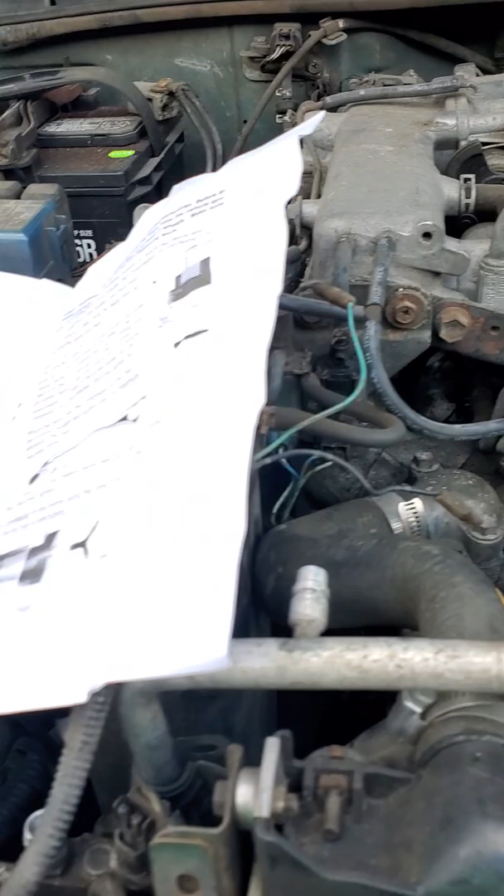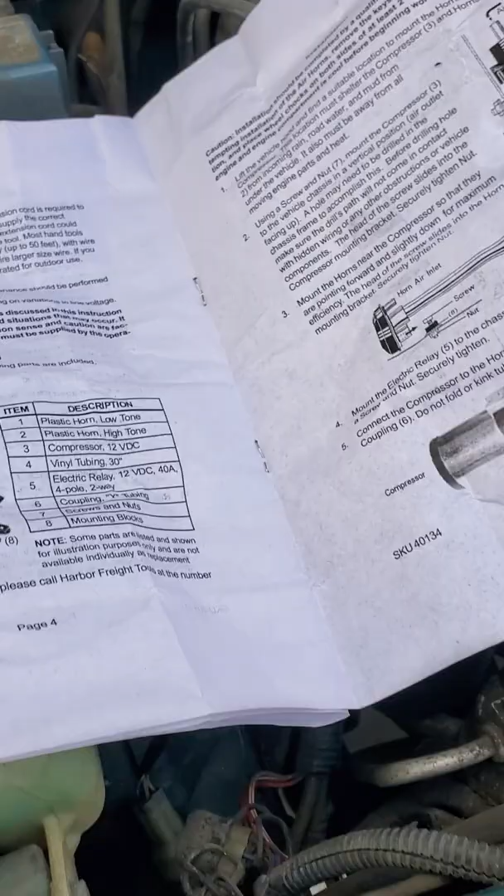I have one of these right here, a super loud 12-volt air horn. I want to say I bought this at... wow, that's a lightning storm... I want to say Harbor Freight. Did I buy it at Harbor Freight? I want to say Harbor Freight.

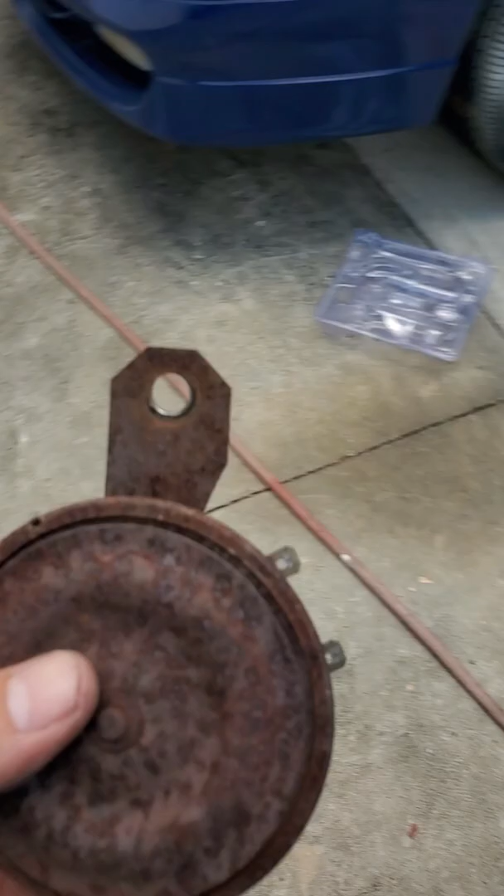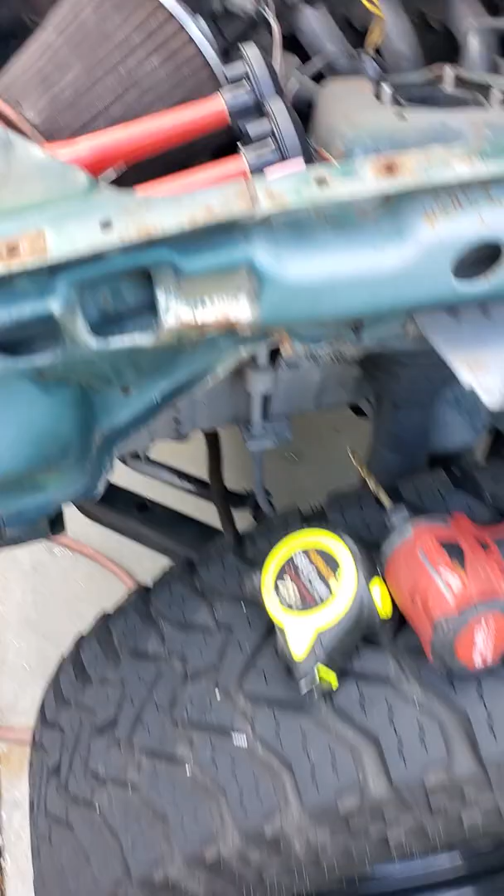And my original one that went here took a shit on me, which is this one right here. So I just went ahead and took it off. And this is where I am going to set it up at.

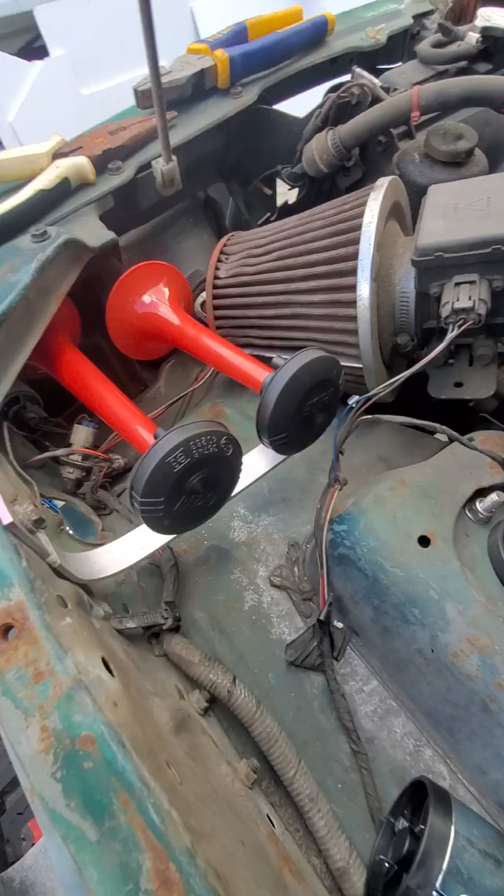So you got your intake here. Let me pull back, you got your intake right here. And I got some aluminum flat bar, bent it 2 inches. At 2 inches I bent it. And this is the bolt that has the ground on it. Make sure you put that back. And that's what it looks like, right?

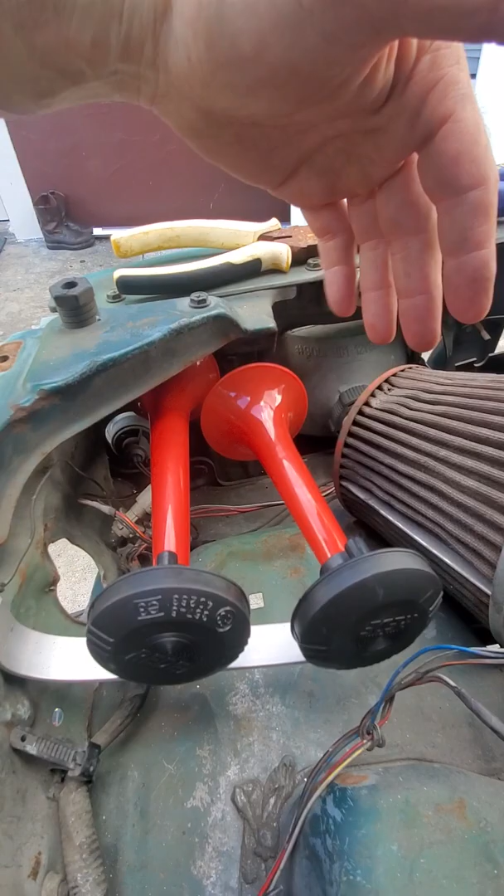And you can turn this either way you want, depending on how you want it to adjust. I can just loosen it up, turn it like that, and that's it, you know? That way it ain't hitting up on anything.

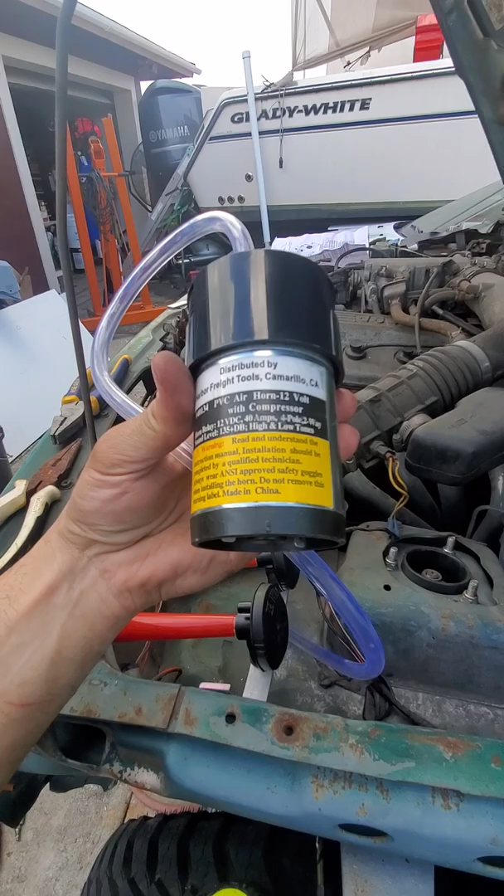And it comes with this little hose and this motor. So I don't know how much power this got. And I'm gonna have to set this up.

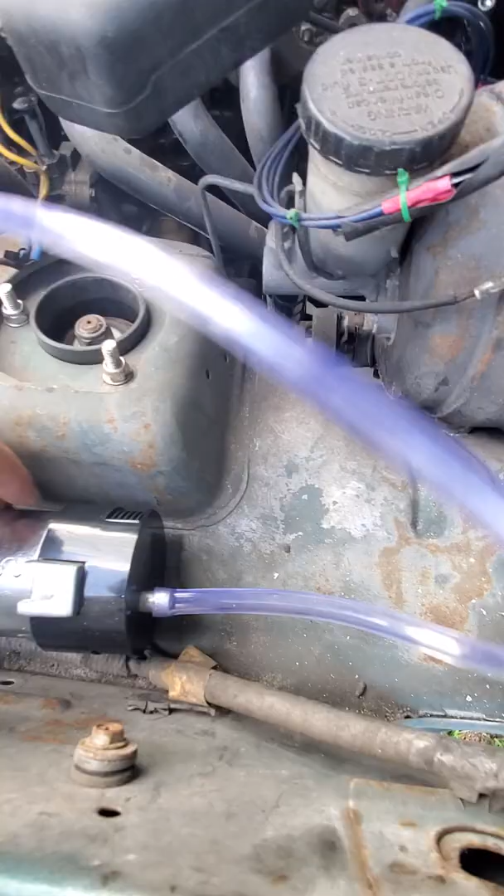Maybe right here, something close where I can hook up this little hose. Yeah, it's just a little piece of hose they give you.

So give me a chance to figure some of this out. The other thing I got to figure out is this relay it comes with. It didn't come with any wires or anything, so you got to run all your own wires.

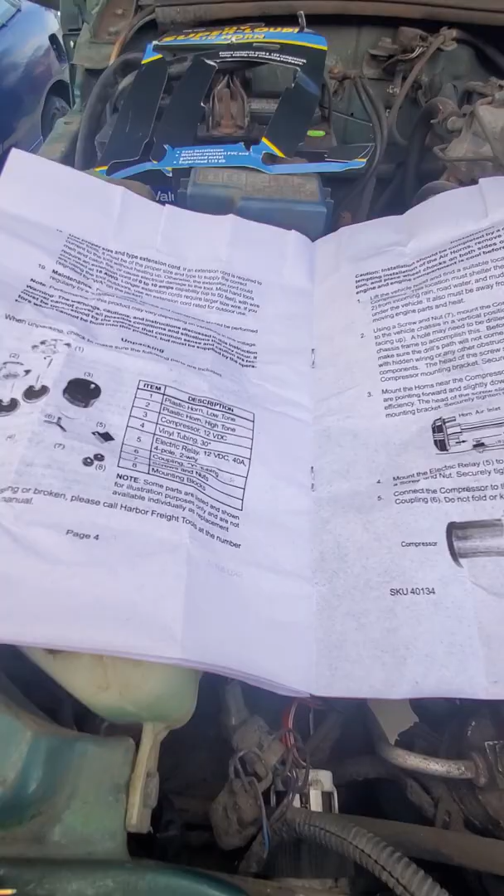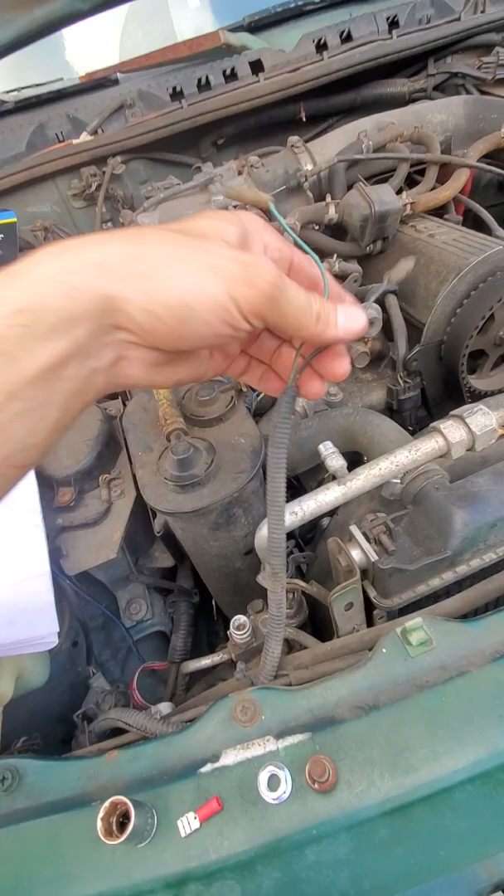And this is the diagram right here. So these are your original horn cables. I'm gonna have to put some connectors in there to extend it, and all I'm gonna do is run it straight across and back over to there.

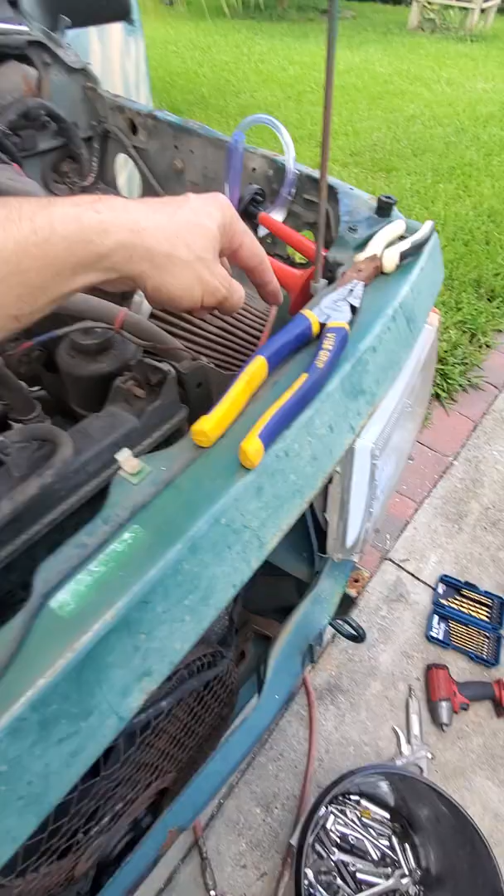As soon as I get this done, I will update it. But for right now, I'm gonna pause it, get some work done, then I'll start showing you after I get it hooked up and what it sounds like.

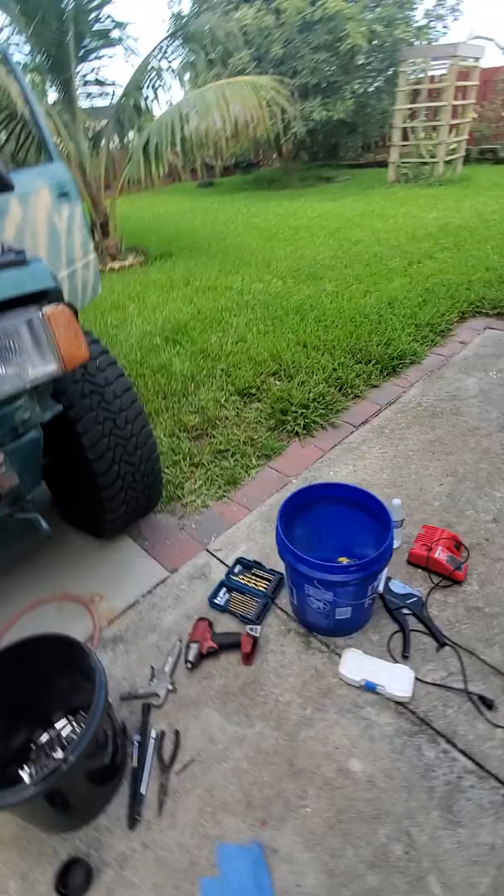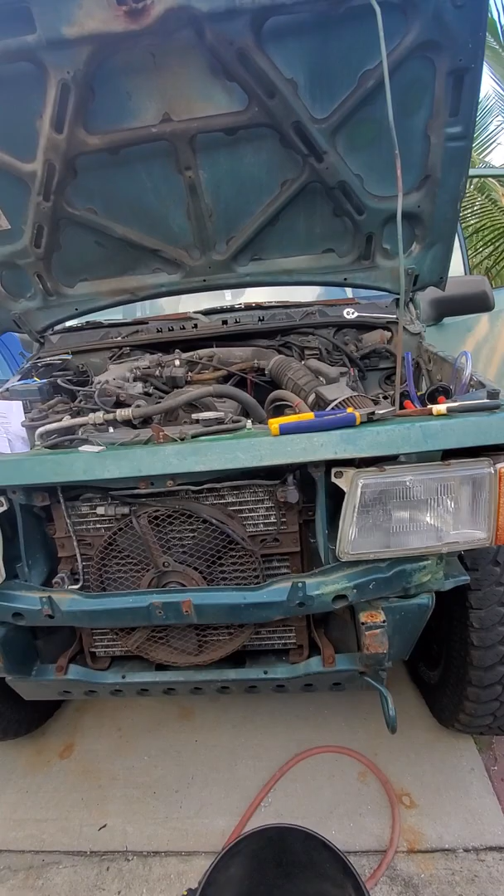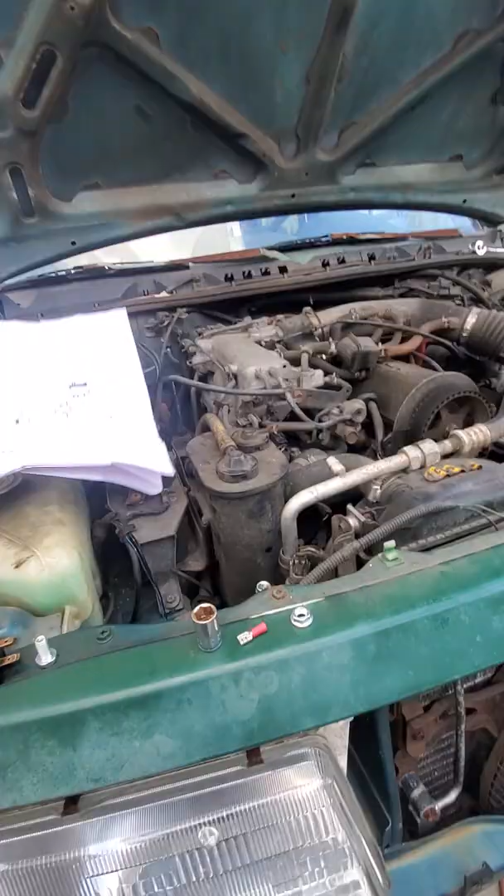So today I'm gonna work on a Geo, get one of my modifications put on, and we'll go from there. So I got the air motor set up, and let me show you what I got.

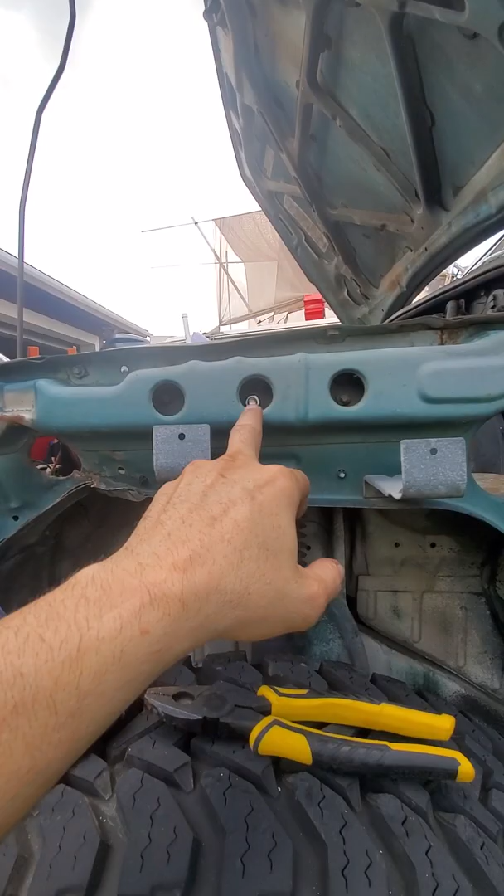So this third hole, center hole right here, when you take off your fender, I drilled a hole in there, and that's where I put it through, and that's what it looks like. So that worked out good.

All you gotta do is drill a hole, and the drill bit was a 5/16, and for these right here, the hole was a 1/4 inch drilled.

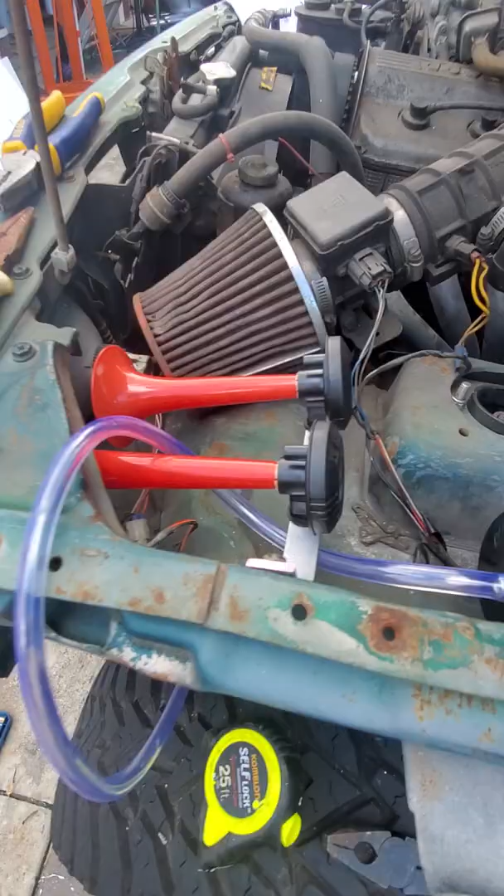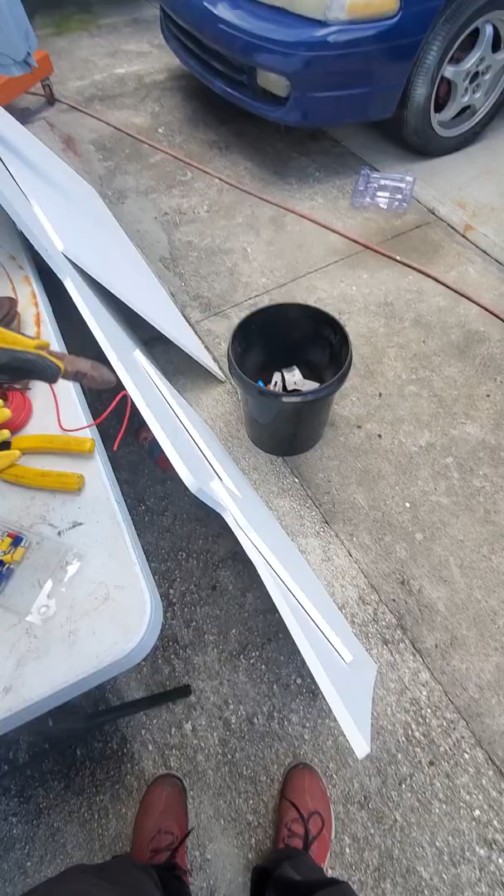So let me get done with the next process, and I'll show you what I did next, which is probably gonna be hooking up the hose with this T right here. So you're gonna have to cut it, so make sure you get something you can cut the hose real nice.

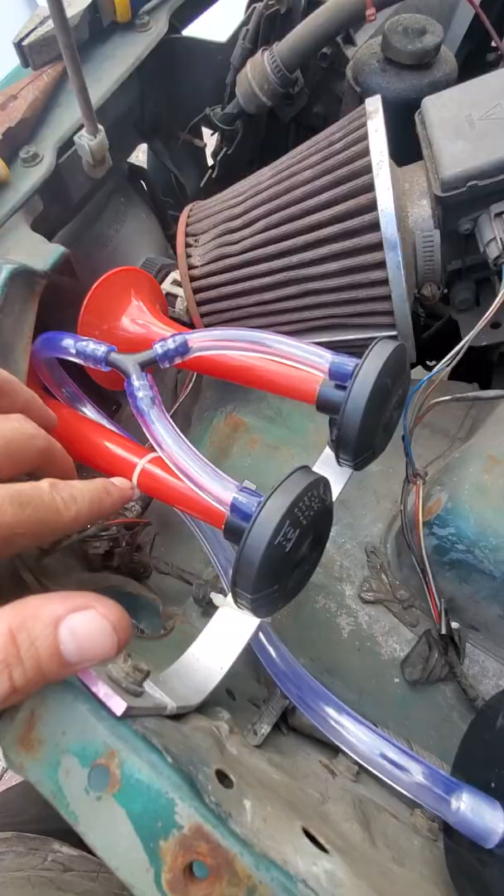So I got this part set up. I just tie strap it there and there to keep it from vibrating off anything. That's all I did right there.

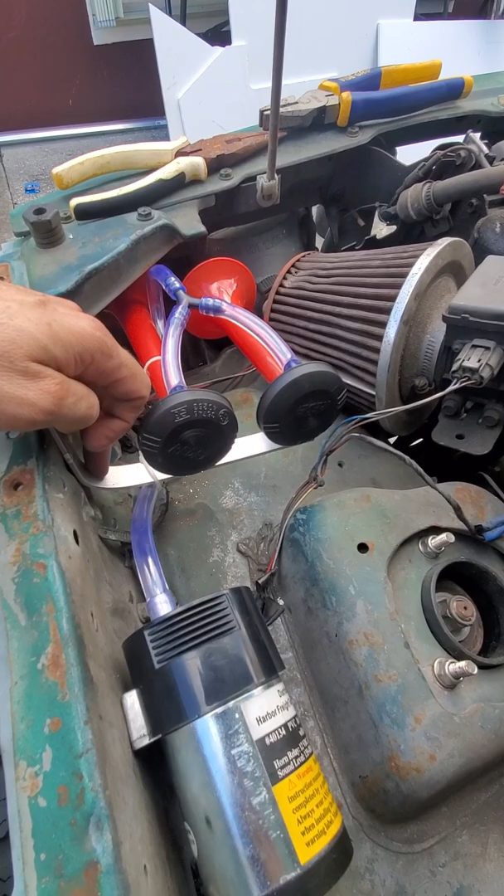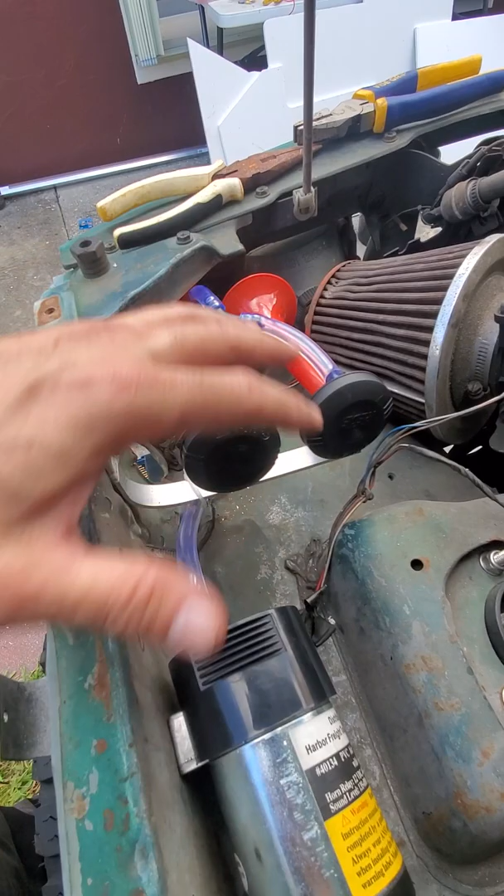I mean, you probably could have, if I would have built this, came up higher with it, then these right here could have been underneath, then your hose would have ran underneath also. So I mean, that's another way of doing it. I didn't want to do it that way, because if I got to work on it, I want everything on top, so it's easier for me. That's just me, but everybody's different.

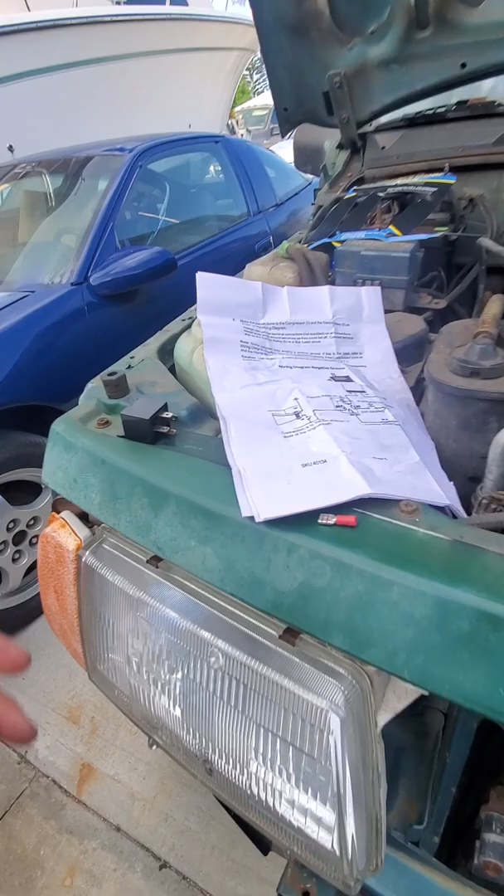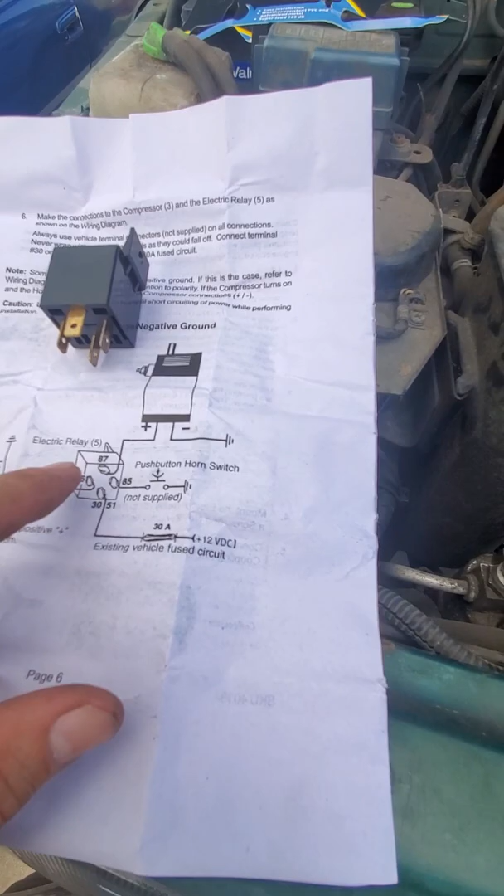This is just an idea, it's up to you. So next thing I'm gonna be doing is running the wires, and this is where I have the headache set. So this is what they give you, which 87 is running to the positive there, then your ground is off the chassis, if I'm reading this right.

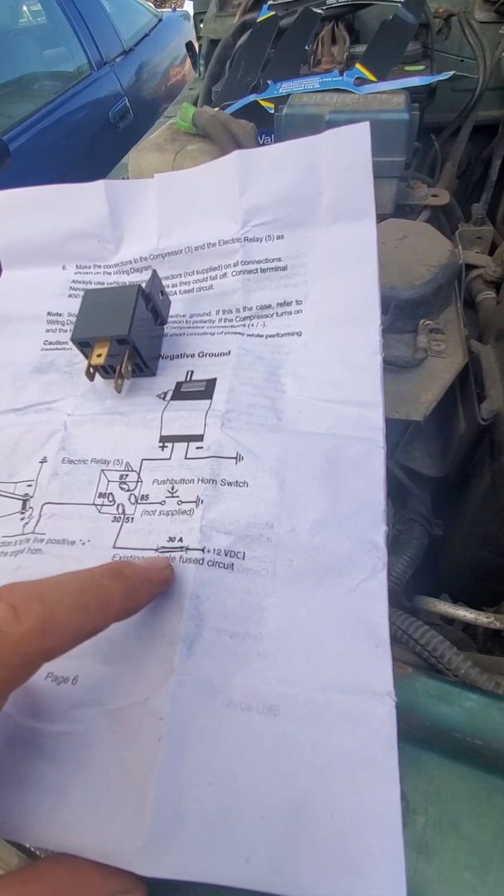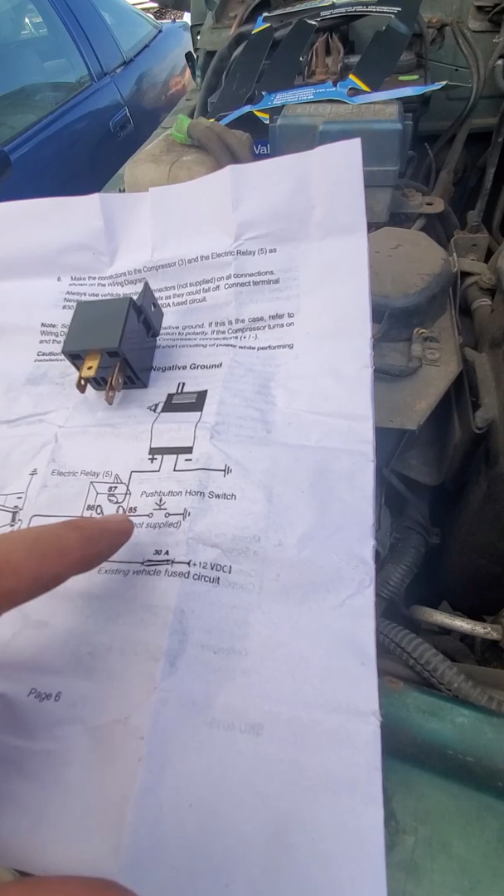Then push button horn there. It's an existing vehicle fuse circuit, so they want you to hook it up to a 12-volt fuse. That's terminal 30, so that's going to be positive going in, then it goes out to there. Then your horn, your push button horn, and this one connect to the live positive point of the original horn.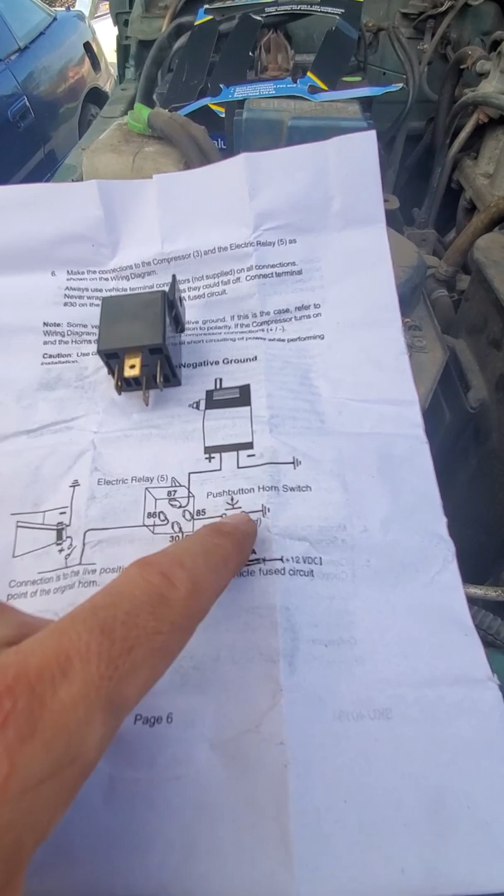It says not supplied. Imagine that's your ground, you see how they got these marks here? So that's your ground, not supplied, and this is your live positive.

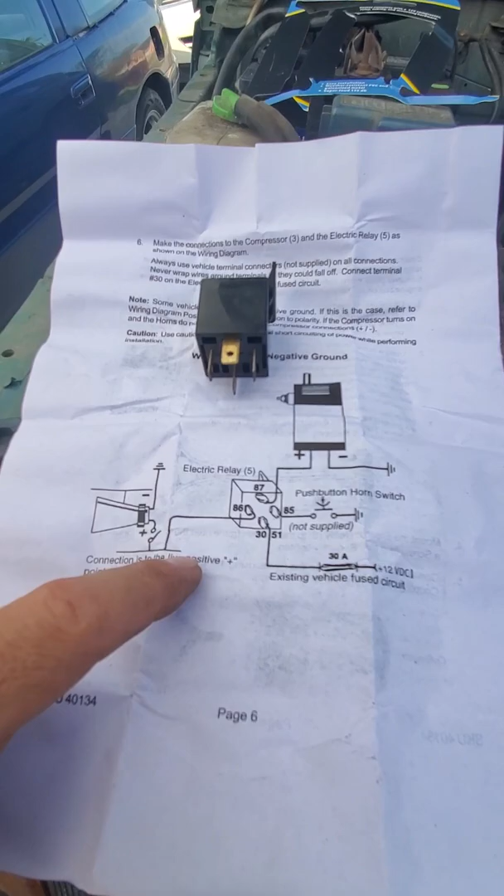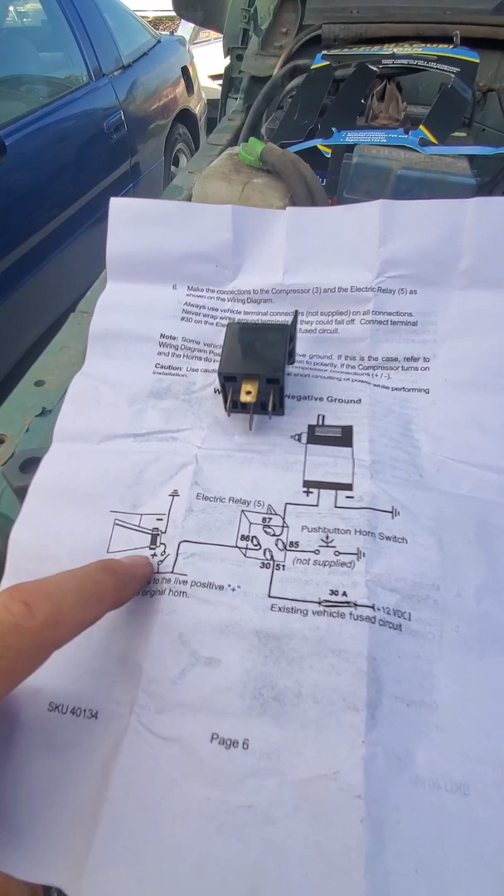So 87 is your positive, your horn. You put the negative to the chassis. 85 is your cable that's not powered, it's your ground cable, which is this black one. Then your green one, your green one is 86.

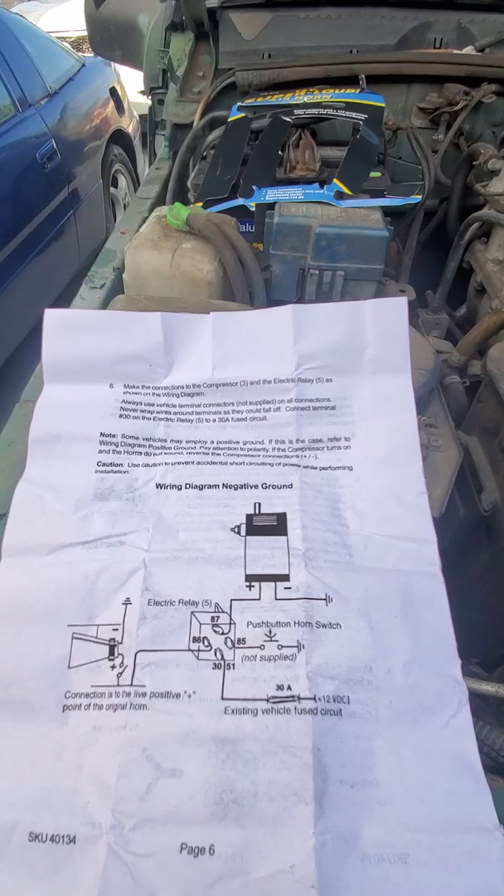And your 12-volt right here with a little fuse. Imagine if your little fuse, just in case something happens, it pops a fuse and doesn't burn your car down. So that's that. So let me get to it, and hopefully we can make the thing make some noise today and try it out.

See if we find any of those Karens around, you know, those Karens. See how they react. All right, give me a minute.

So I got the cable and I just put it there. I like using the existing bolts and stuff we got, and this is a connector I use for this one right here, and the other one just one of the regular ones that I take.

Give me a second and I'll show you the next process, which is hooking up to here and going over there like that diagram says.

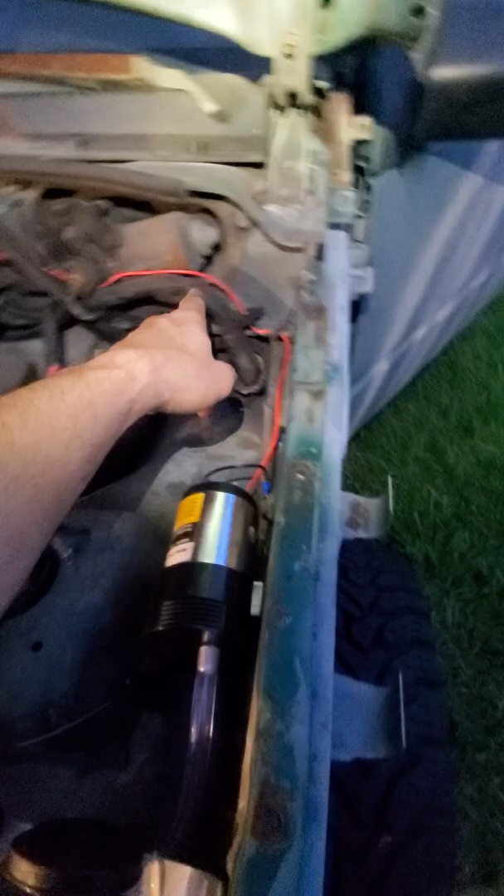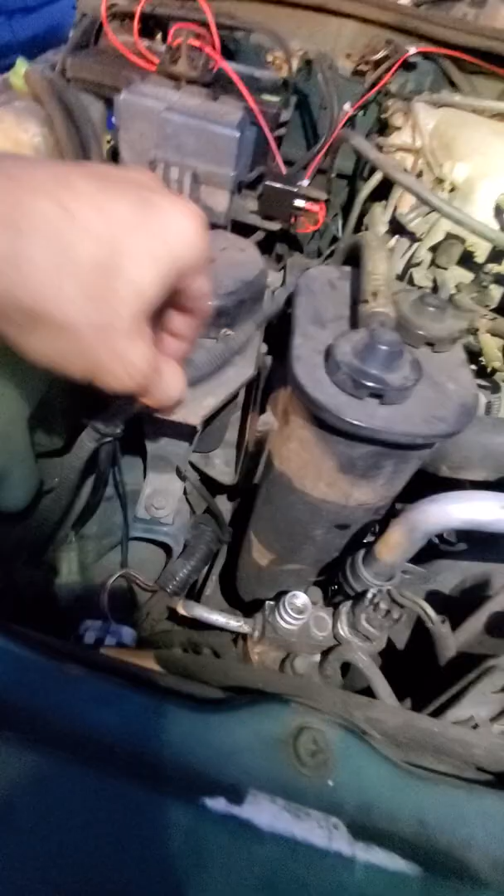So everyone, I ran all the wires, did my ground right here, positive, ran it back through the firewall. This is the setup here finally. The horn cable, I just ran it here and I hooked it up right there.

Then you run the diagram like I told you, right? And I just tie strapped it there, that cable that came over there. And here you got to run it straight to here.

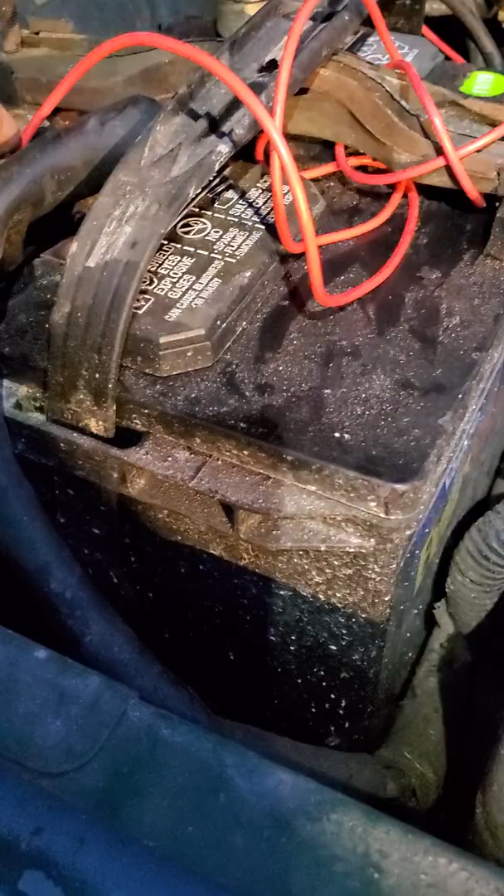Since I don't have a terminal where I can hook up a fuse and extra outlet, I'm going to order that on Amazon. That way I can hook it up there with a fuse. So temporarily I just ran it like this for now. So let me test it out and see how loud this thing is.

So I got everything hooked up, and for some reason it's not working. And I test the old horn and it works.

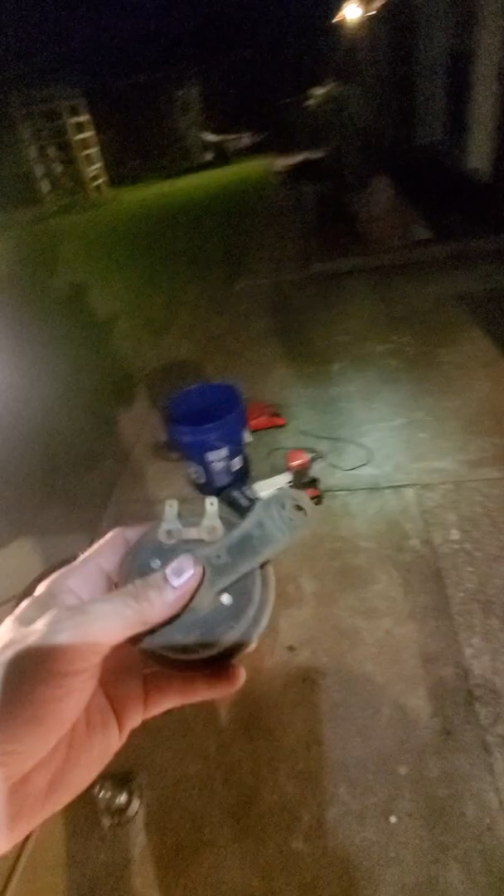And I checked the fuses underneath the steering wheel, and all the fuses there are good. Let me turn this off. So everything there is good, and it still won't honk even when I put back the original.

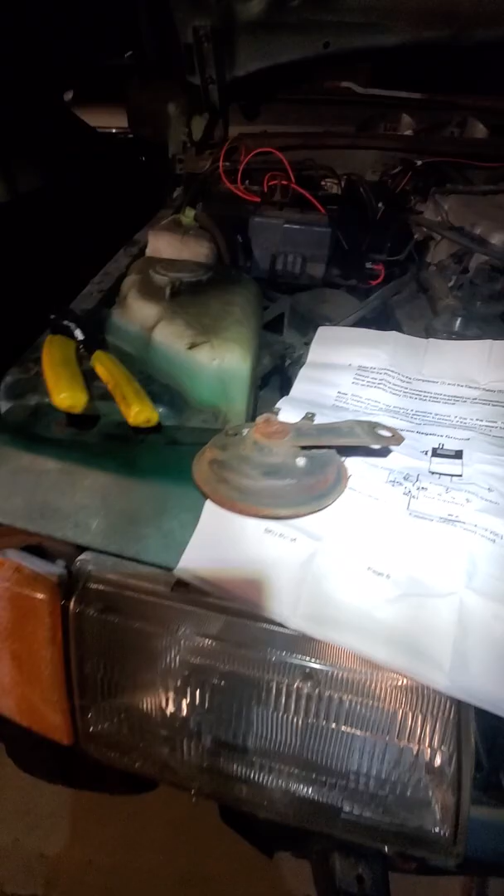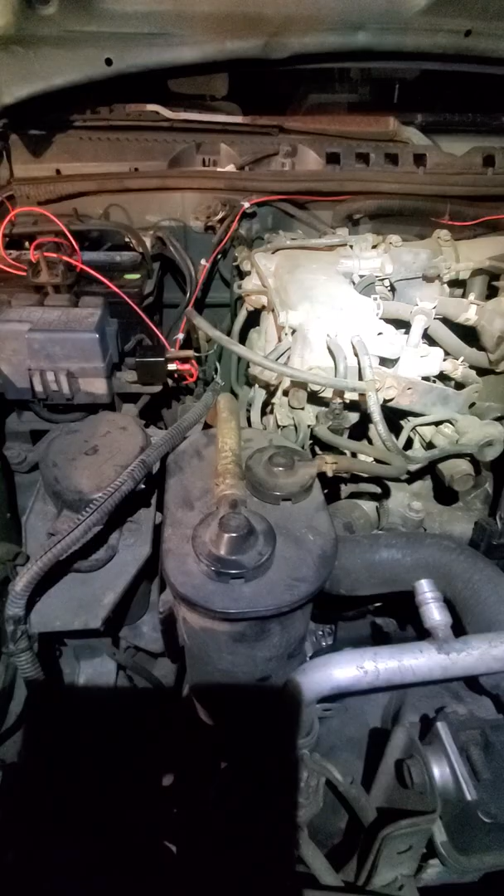So for some reason I'm thinking now, I'm not going to be able to show you what it sounds like, but what I'm thinking, maybe my horn buttons are bad, that's the only thing I can think of. I went through the cable and I couldn't find any bad spots or anything, nothing cut. Checked the fuses, everything's wired up right, I just ain't getting no signal.

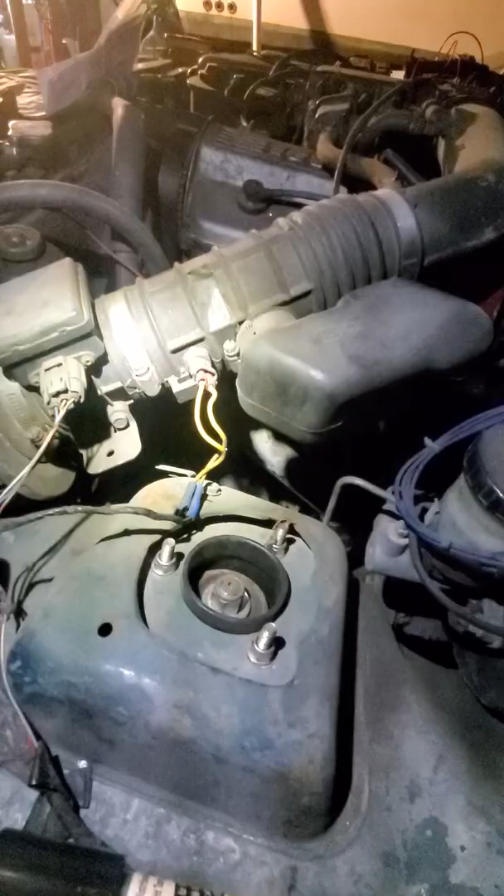So I'm gonna have to get back with y'all later on, find out what's going on. So I might have to take apart my steering wheel to get to the horn buttons, see if that's the problem. So I'm gonna have to leave that one for another video. It's getting late, mosquitoes are biting, they eat you up over here in Florida. Let me put this back in.